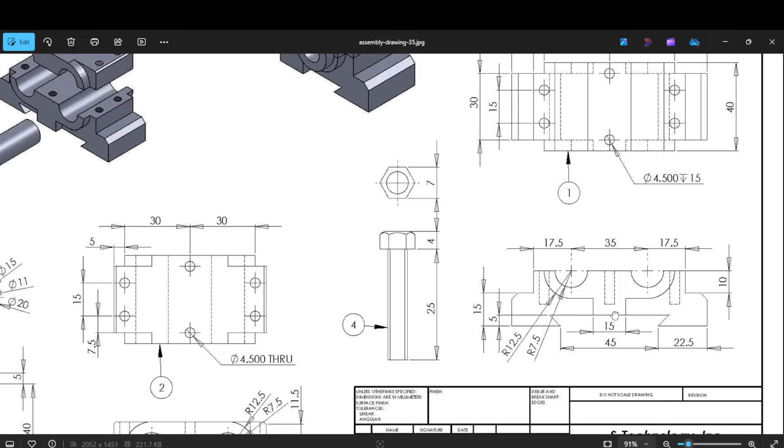This is the front view. Okay, so you are watching it from here, so this will be your front view. So we will draw the front view in Solidworks. Go to File, select New Part. Okay, select front plane, go to Sketch, select Line, trace the origin. Okay, go straight, click here, go 45 degrees,

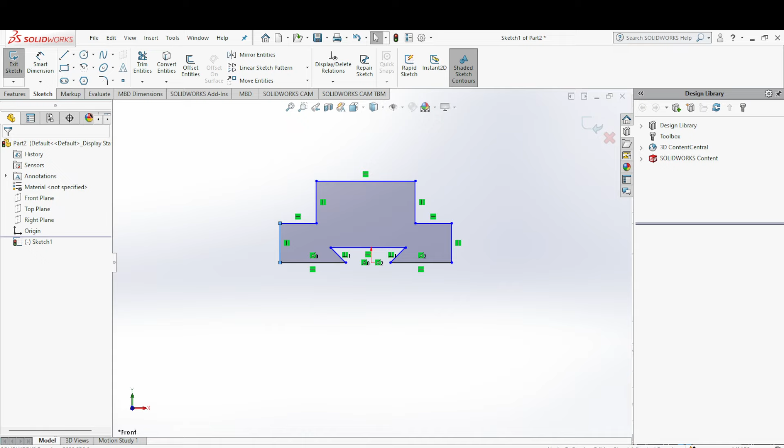go right side. Okay, then again come 45 degrees towards left and go right side, go upside, left again, then go upside and left, downwards, left and downwards, then click OK. Now we must give the dimensions. So start giving the dimension from the bottom side. Okay, so this distance is 22.5, so go to smart dimension, give it a distance 22.5, and this is also 22.5.

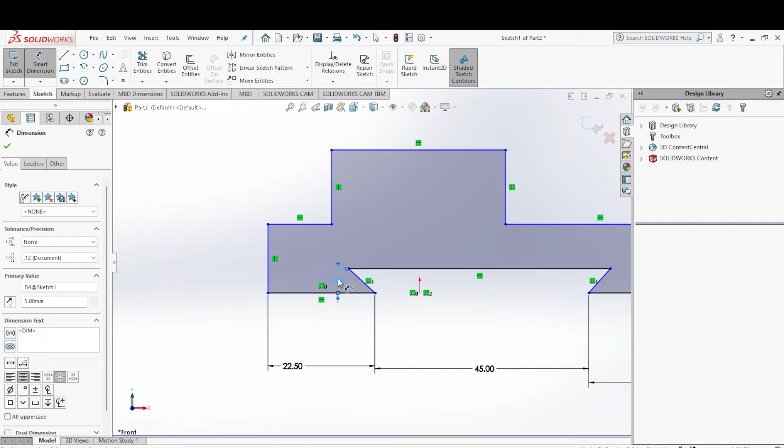Then the distance of the slot here is 45 millimeters. So give it a distance, and from this point to this point the distance is 45 millimeters. Okay, then the height of this slot is 5 millimeters. Okay, so zoom in. From this point to this line the distance is 5 millimeters. Okay, now the height here is 15 millimeters. So this will be 15 millimeters. So these two are in a relation. If not, you should give here also the same height, which is 15.

Okay, so next, this height is 10, so give it a height 10. Okay, and this is also 10. So after that, this complete distance here is 35 plus 17.5 plus 17.5. So 17.5 plus 17.5, which is equal to 35. 35 plus 35, which is equal to 70. Okay, that means this distance here is 70.

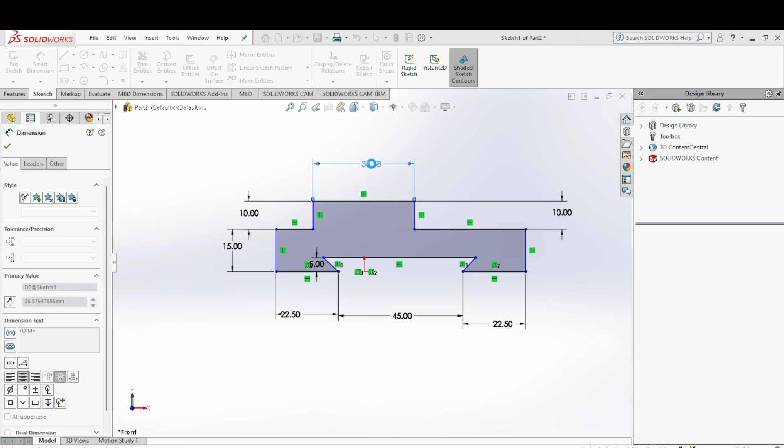So afterwards, what is remaining? We need to align this in the center. Okay, so you can give the relation between the origin and this line, like from this origin to this line the distance is, okay, we already have this distance as 5. So this is the origin, so no need to give another dimension, just delete this one. This distance is 45, the slot distance is 45, so the half of which will be 22.5. So we can specify the distance between the center and this point, which is equal to 22.5. Okay.

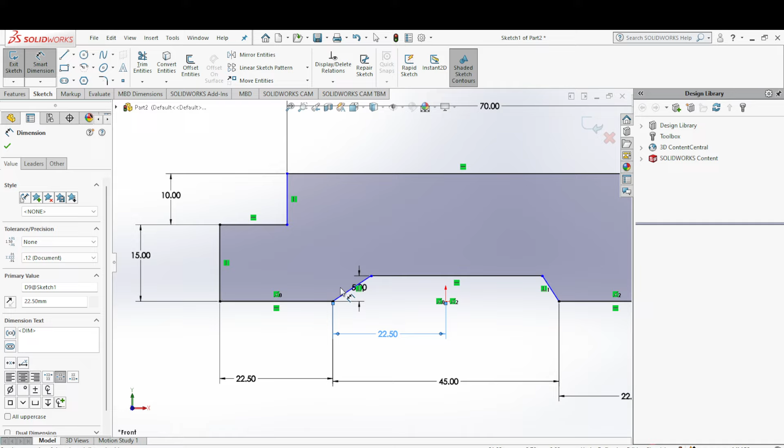Okay, now the shape of this slot is distorted. So this should be inwards. So we can specify the angle between this line and this line as 45, so it will go inwards. So to specify the angle, we need to click on this line and this line. This angle must be 45 degrees. Okay, so now it got into the slot, became like this.

Okay, so now again we need to specify the midpoint to the center distance as 0, so that it will go exactly in between. Okay, so the distance between midpoint to the center must be 0. Now the figure is fully defined. Click OK. Just let me arrange the dimensions. Okay, now the figure is fully defined.

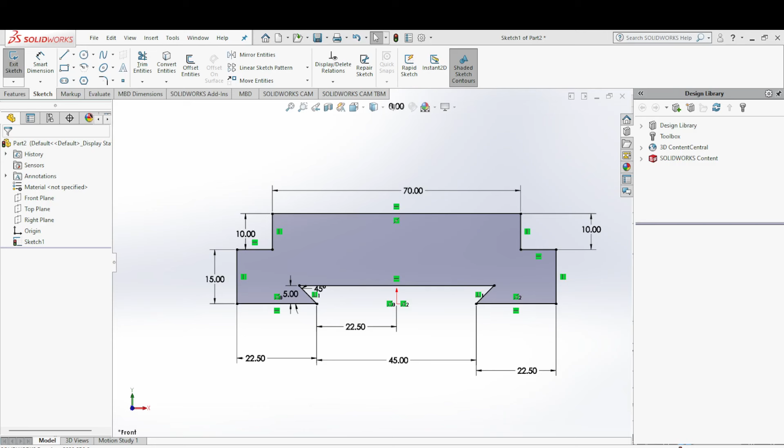Okay, click OK. After that, we need to use the extruded boss base function to give it a width 30. Okay, so go back, select the features, extruded boss base, and give it a width of 30. Then click OK. Now if you observe here, there is a chamfer, but the chamfer distance is not given. So we can give 1 mm or 2 mm of chamfer here.

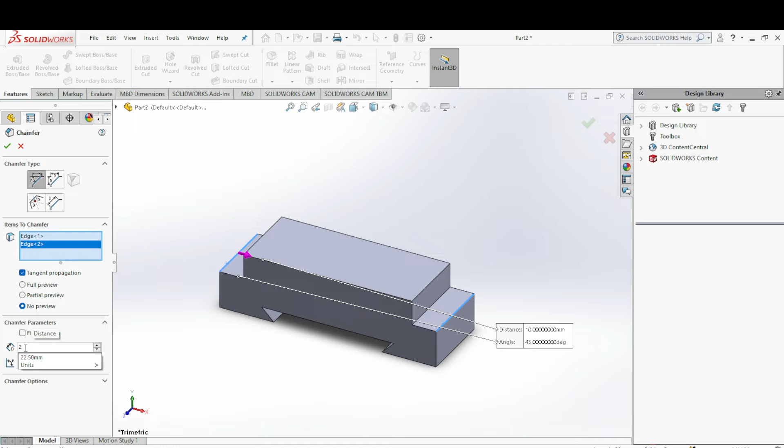So to give the chamfer, go to chamfer, then select this line and this line, select these two edges, then give a distance of 2 millimeters, then enter. 2 millimeter, type here 2 and enter, then click OK.

Now we need to draw this shape. Okay, we need to draw this portion on the front surface, front face. We need to draw this portion and extruded boss base it till a distance 5 millimeter. Okay, 5 millimeters towards left side and 5 millimeters towards right side.

So to do this, we need to draw two circles. See, the smaller circle is of radius 7.5. The radius is 7.5, that means the diameter 15. The bigger circle is of radius 12.5, that means the diameter 25. Okay, so first of all we will draw this one. Okay, we will draw this shape, then we will make two holes later.

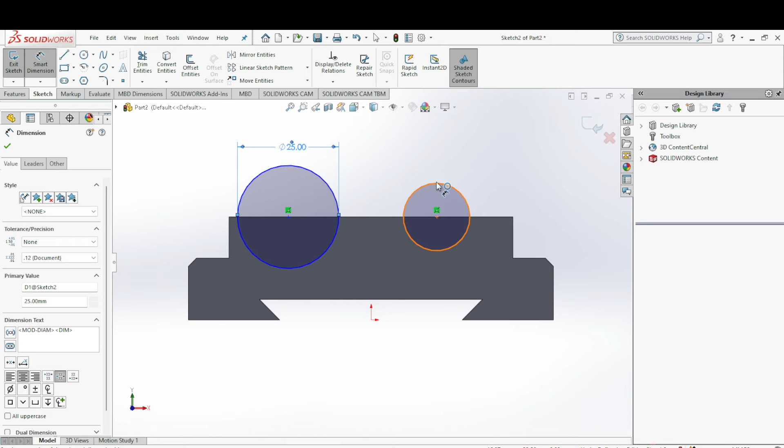Okay, let's draw the bigger circles first. Okay, we need to draw two bigger circles of diameter 25. Okay, so select this face, go normal to, then go to sketch, select circle, come on this edge. Okay, then place a circle here, place a circle somewhere here, then click OK. So go to smart dimension, the diameter of this circle is 25 and also the diameter of this circle is 25.

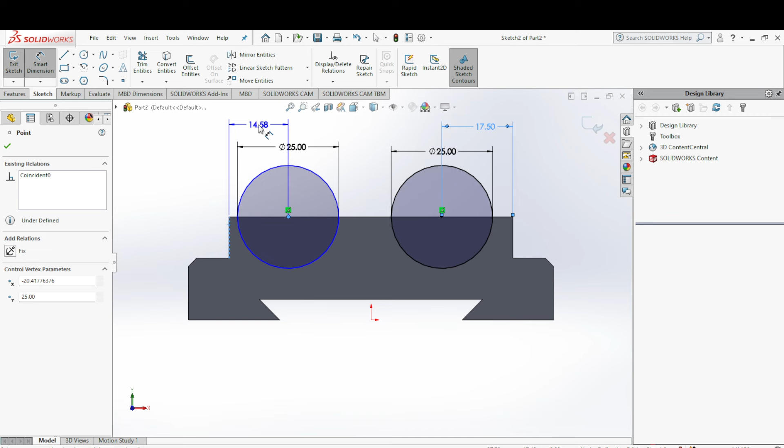Now we need to specify the distance from the origin to the end point, which is 17.5 millimeters. Okay, from the origin to the end point, which is 17.5. So from the origin to this line here, the distance is 17.5 millimeters. Similarly, the distance between this center to this edge is 17.5 millimeters. Now click OK.

Now we need to draw two lines, or we need to connect these two circles by a line. Okay, so let's connect, select the line and connect these two circles. Okay, like this, then right click, select. Now you have connected these two circles. After that, you need to draw two lines, two vertical lines, which are 15 millimeters apart. If you select the midpoint, from the midpoint it should be 7.5 towards left side and 7.5 towards right side.

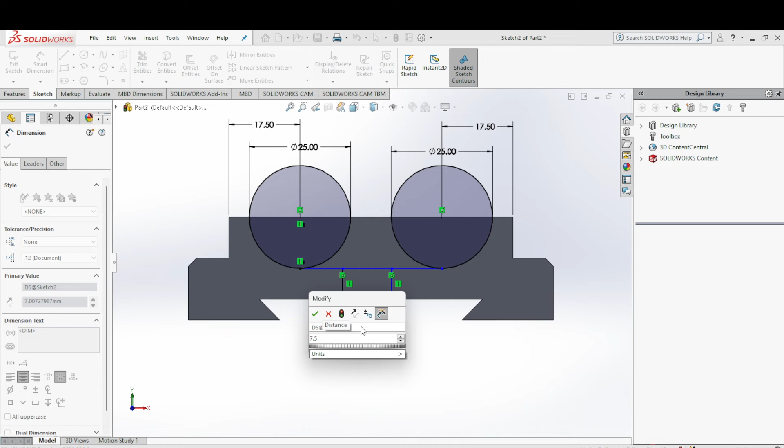Okay, so now go back to the sketch, select line, go to the midpoint. Okay, now from the midpoint go towards left side. Okay, or no need to draw a line here, simply select the line. Okay, draw a vertical line here and draw a vertical line towards right side. Then specify the distance between the midpoint to this line as 7.5, and similarly the distance between the midpoint to this line 7.5. Okay, now select OK. Now the shape we need here is this one.

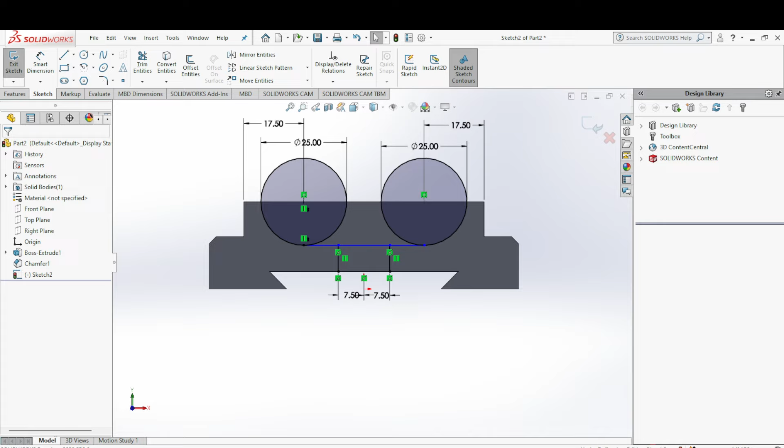Okay, so we need this shape, so let's complete the shape here. Select the line, connect these two lines and connect this total thing. Right click, select. Okay, so now we need to cut the unwanted portions. Okay, we need only this portion of the figure, so anything extra we need to trim it. Okay, so please see here carefully, we need only this portion. Okay, so anything extra we will trim it.

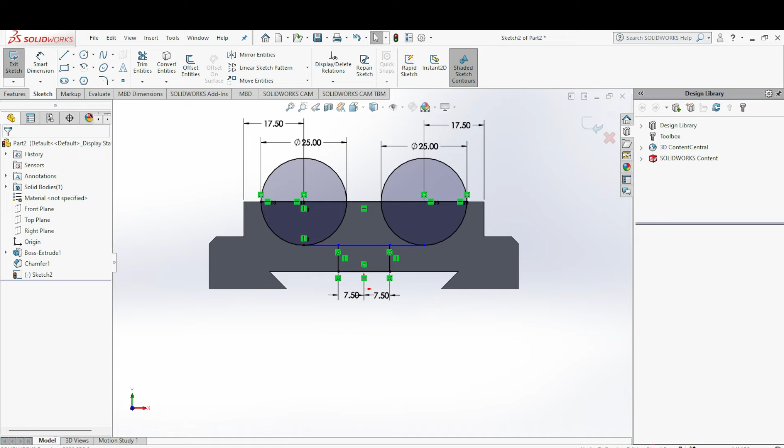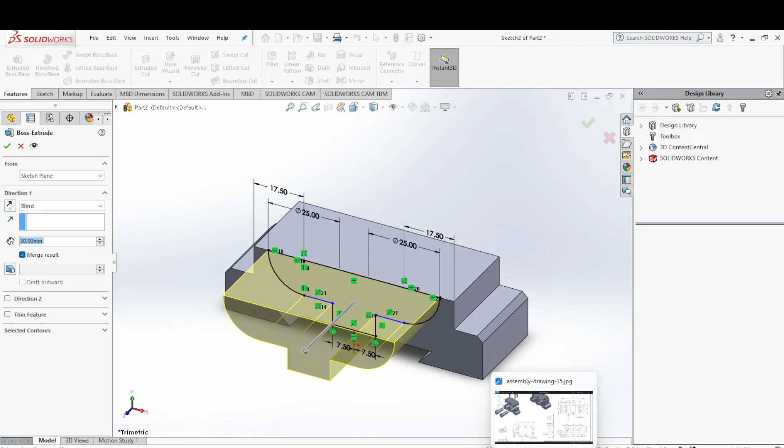So go back, select trim entities, so we need to trim this one and we need to trim this, we need to trim this one and we need to trim this and this. We need only this portion. Okay, then click OK. Now go to features and select the isometric view, go select extruded boss base, and as I explained before, this is 30 and towards left side it is 5 and towards right side it is 5. So here we can extruded boss base it towards left side for a distance of 5 millimeters. So make this 5, enter, click OK.

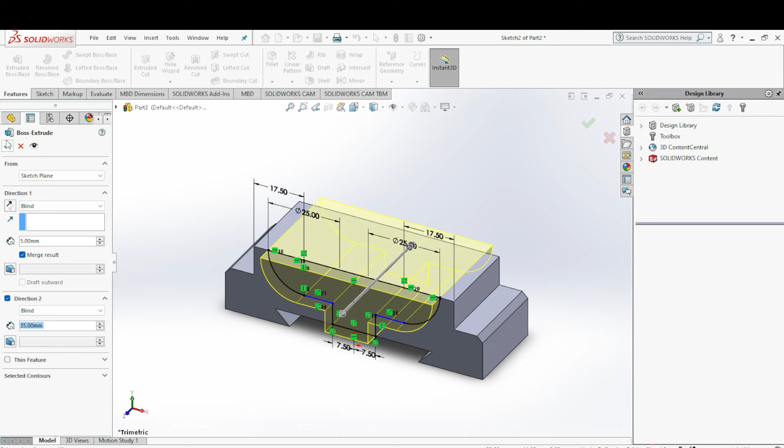Okay, we can also do it on the other direction, which is towards right side. So towards right side this is 5 millimeters, but we are starting from here, so we need to add this 30 millimeter as well. So this is 30 plus 5, 35. Okay, so give it a second direction. Turn on the second direction and towards second direction it should be 30 plus 5, which is 35. Write 35 millimeters. Okay, then click OK.

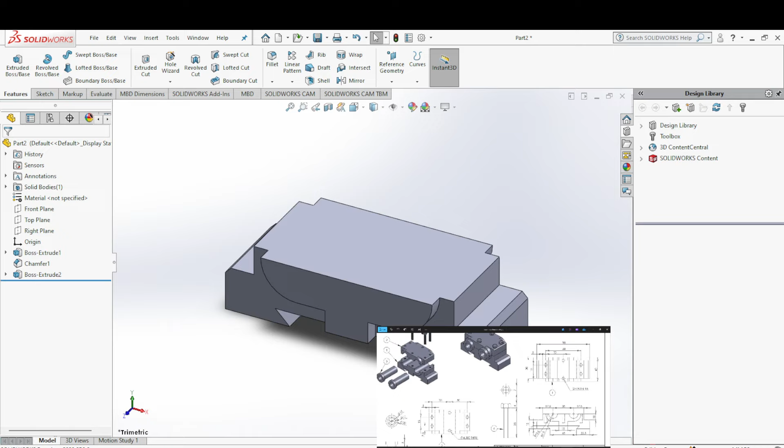So now we are almost done. We need to place two holes here. Okay, see the smaller holes which are of radius 7.5. This radius 7.5 means the diameter is 15. So select this face, select normal to, go to sketch, select circle. So to find out the center of the circle, come and wait on the circular portion. Now the center is visible. Click here and place a circle. Similarly, wait on this second circle to see the center and place a circle here and click OK.

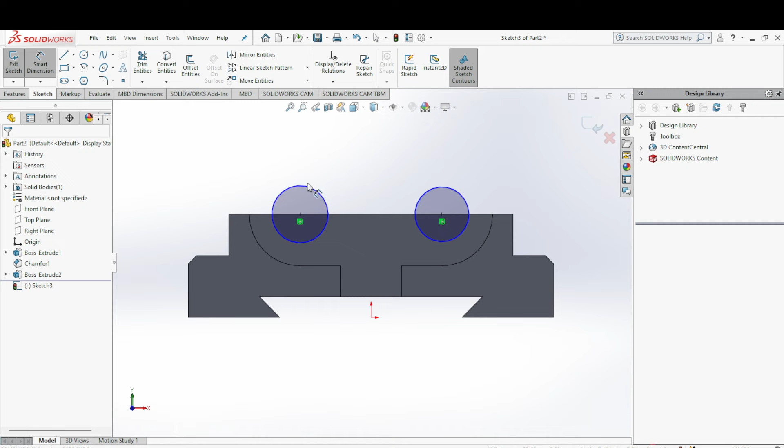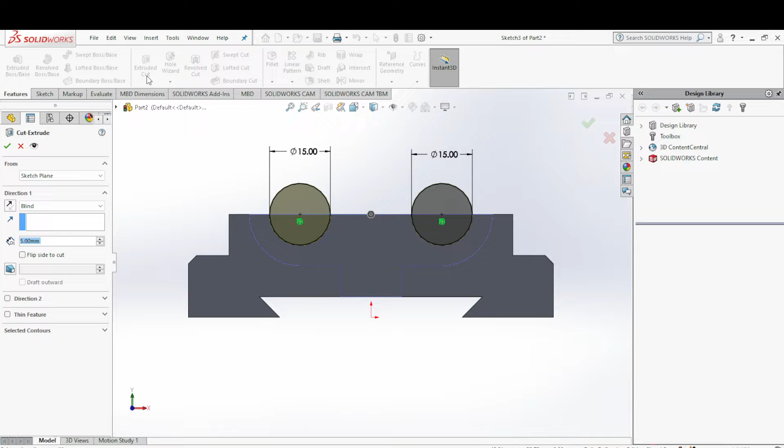Now go to smart dimension and give the radius or the diameter. Radius is 7.5, so the diameter will be 15. So this is 15 and this is also 15. Then click OK. Now we are ready to go. We need to make two holes here. See, we need to make two holes through all. Okay, so go to features, select extruded cut, and to see the direction, select isometric view, and here you can select through all both. Okay, so then simply click OK. Now the first part is created successfully.

Now what is remaining here? So if you see, there are 6 holes, which are of diameter 4.5. Okay, we need to place these holes. 1 2 3 4 5 6 holes. So let's place them one by one.

So the holes can be placed easily on the top view. So let's select the top view, select normal to, then go to sketch, select circle, now place the circles like this on this line. Trace this one, place a circle. So here we need to trace this and place the circle.

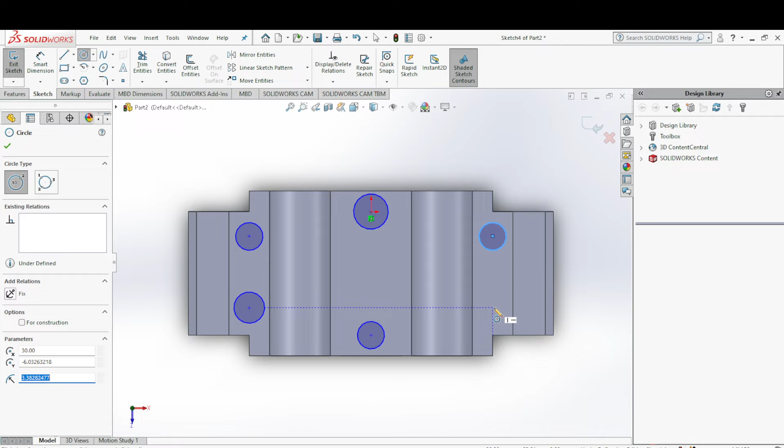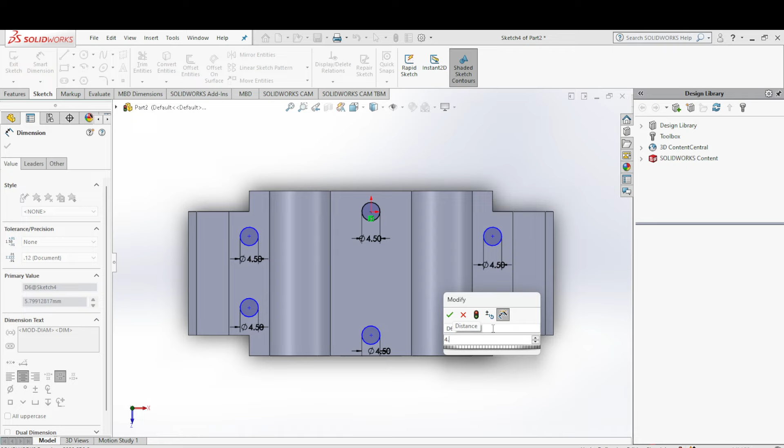So all these circles are of diameter 4.5 mm. So go to smart dimension. So this is 4.5. This is also 4.5. So give all the 6 circles diameter of 4.5.

Now we need to give the distance. Okay, so the distance between these two circles is 15. So the center to center distance from this circle to this circle is 15. So the total distance here is 30. So if this is 15, the remaining distance will be 15, which is divided into 2, which will be 7.5. 7.5 here and 7.5 here.

Okay. So the distance from the center to this edge is 7.5. So no need to give 7.5 here because there are already two dimensions, so no need for a third one. If you check, this one will over define the figure. See, it's already 7.5. So no need. Simply press escape.

So do the same thing here. The center to center distance, go to smart dimension. The center to center distance is 15, and the distance from the center to one of the edges here is 7.5. So next thing,

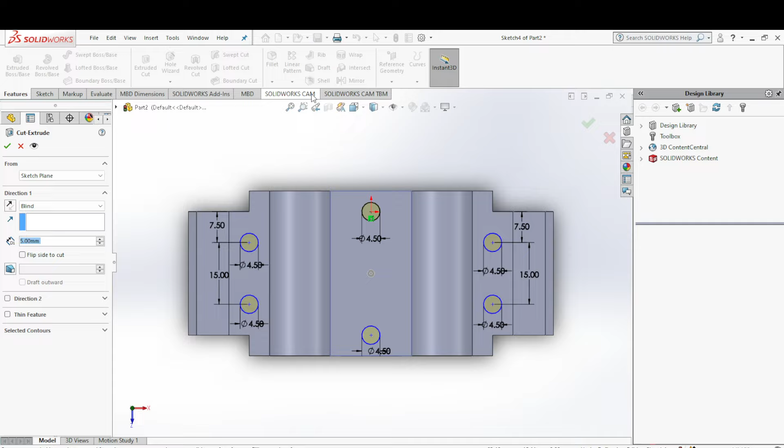So go to features, extruded cut, go to isometric view and give it a depth of 15 millimeters. Then click OK. Now the holes are made. The first part is completed successfully.

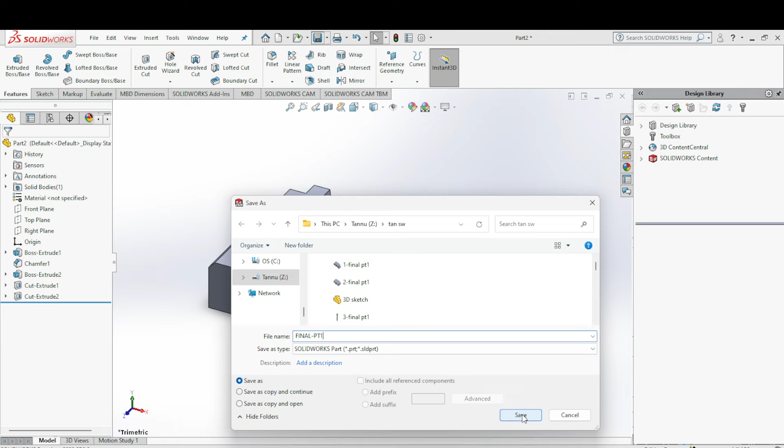Now you need to save it. Save, type any name like final PT1, part 1. Okay. So now close it and open a new part file to draw the second part.

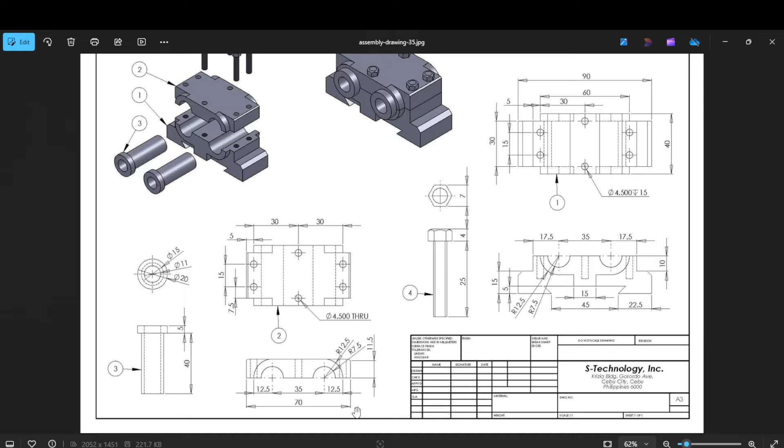So the first part is over. The second part is the upper portion, which is here. Again we will select the front view to draw this part. So first of all we will draw the rectangle. The length of the rectangle will be 70 and the height is 12.5.

Here the height is given as 11.5, but if you observe closely, there is a chamfer of 1 millimeter. So the total height is the height of the circle. The height of the circle here is 12.5. So 1 millimeter is reduced because of the chamfer.

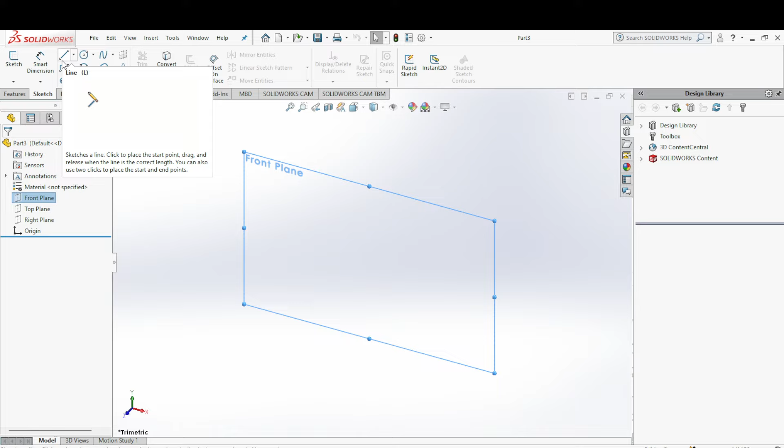So first of all, we will create a rectangle. Then we will give an extruded boss base of 30 again. So this is 30 and this is 5. This is also 5. Okay, now let's go to the front plane. Go to sketch, select a line, or you can select a rectangle as well. So draw a rectangle.

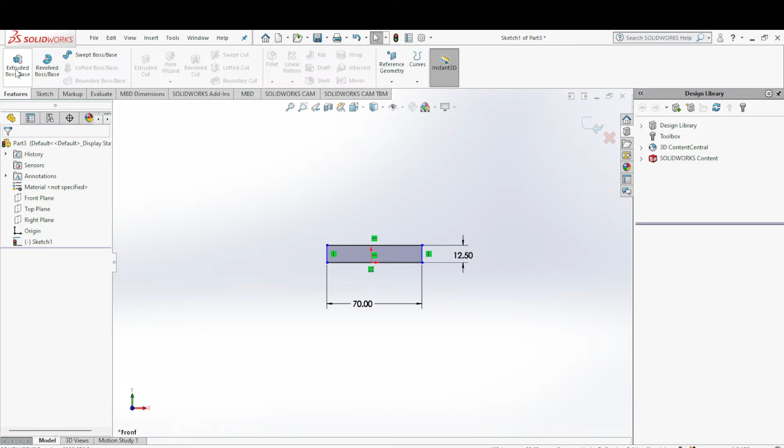Click OK. Go to smart dimension. The length of the rectangle is 70 and the height of the rectangle is 12.5 millimeters. Then click OK. 70 and 12.5. Now we need to extrude it to a distance of 30, so go to features, select extruded boss base and give it a width of 30. Enter. Then click OK.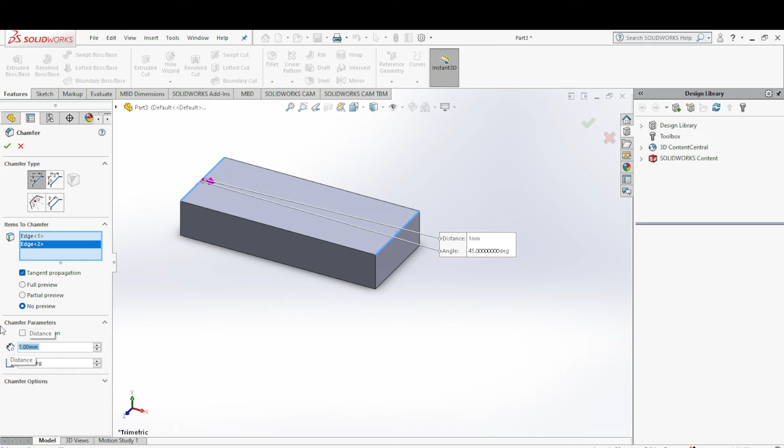Again here we have a chamfer. The chamfer is very small, which is 1 mm. So go to chamfer, select this edge and this edge and give it a distance. The chamfer distance is 1 millimeter. Then click OK. So the chamfering is done now.

So what is remaining? We need to draw this portion now. Again we will follow the same step as part 1. So we will only draw the upper portion like this, then we will make holes at the end.

Now we need to draw two circles of diameter 25. The radius is 12.5. The radius of the bigger circle is 12.5, that means the diameter is 25. Here also the diameter is 25. So we need to place two circles at the bottom of this rectangle.

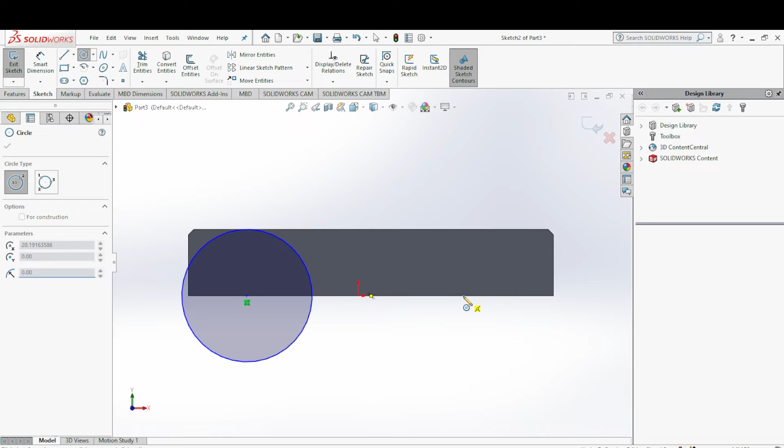So click here, select normal to, go to sketch, select circle. Draw one circle here. If you touch this line, that means the radius is 12.5, because the height of the rectangle is 12.5. So if you trace the circle from bottom to top, the radius will be adjusted to 12.5, no need to specify the radius again. Just drag this line till the upper edge.

Then click OK. Now the distance between these two circles, or the distance between the centers, is 35. So select smart dimension. The center to center distance is 35 millimeters.

Still these two circles are not placed in the middle of this rectangle. So how to place it? Give one more relation. The distance between this center to the right side, the total width of the rectangle is 70 and this distance is 35, so the remaining will be 35, which is divided into 2. That means this distance from the center of the circle to the end of the rectangle, this edge, is 17.5.

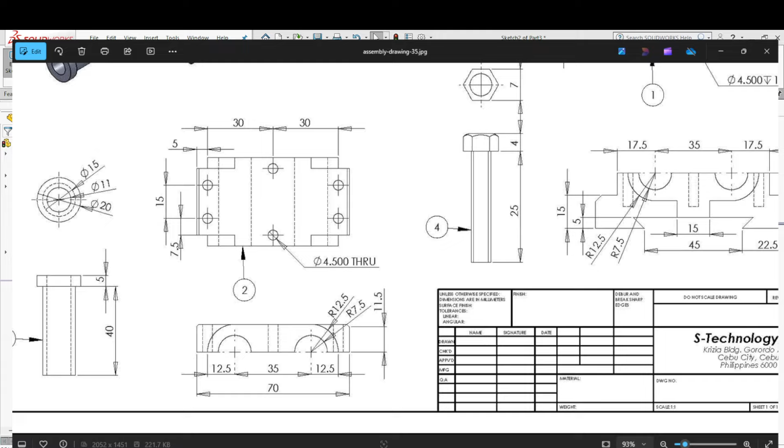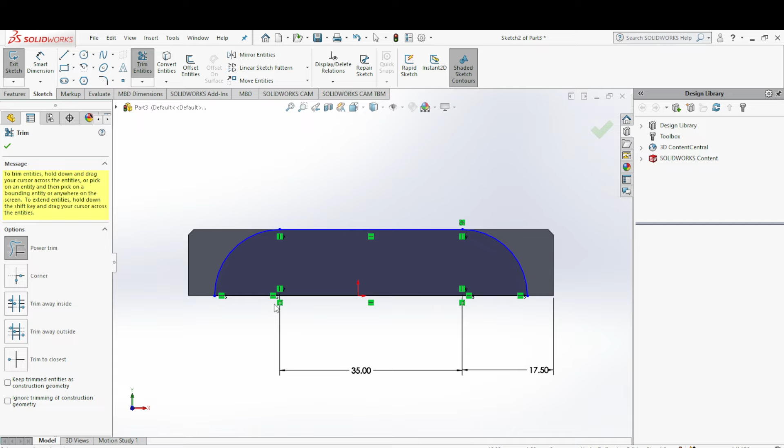Now we need this portion. Already we have placed these lines, so whatever is extra, we need to trim it. We don't need the semicircles which are present outside the rectangle. So now select trim, cut this semicircle and this semicircle, and also this portion we don't need. Delete the semicircles and also this inner portion so that this area is highlighted. This area should appear shaded like this so that it is correct.

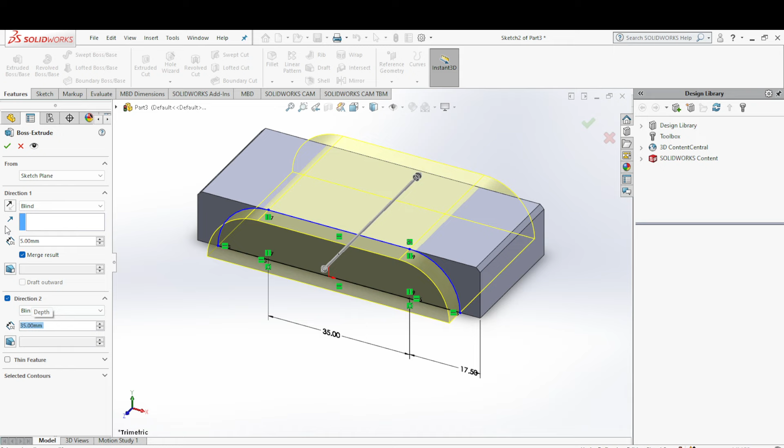Now select the isometric view. Similarly, like we did for the first part, we will use the extruded boss base. In the first direction we will give only 5 mm, and on the second direction, which will be 30 plus 5, which is 35 millimeters. Then click OK. Again click somewhere to see the figure.

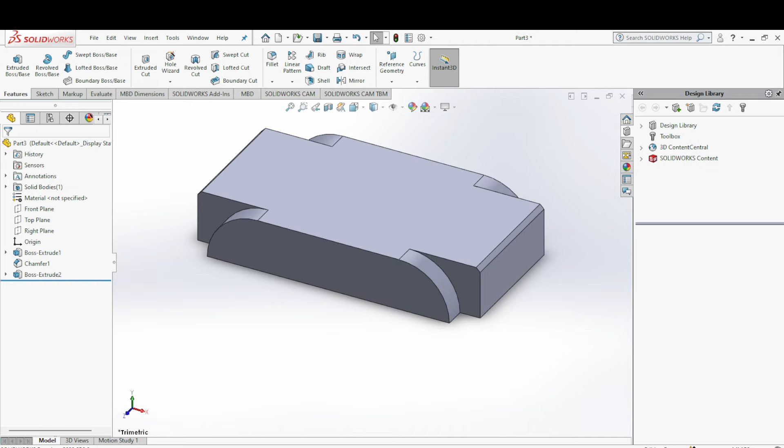Now what is remaining here? The two holes of radius 7.5. The radius is 7.5, that means the diameter is 15. Now click this face, normal to, go to sketch, select circle. To see the center of the circle, you need to wait here so that the center will appear. Click the center, place a circle. Similarly, wait here, the center will appear, then go to center and place a second circle. Click OK. Now the diameter of the circle is 15, and the diameter of this circle is also 15. Then click OK.

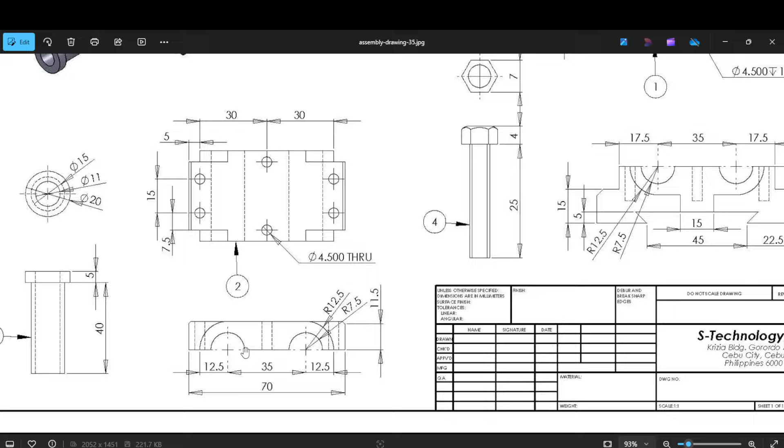Now we need to cut through these circles, through all. Go back, select isometric view, go to features, extruded cut, select through all both. Then click OK to cut from the part.

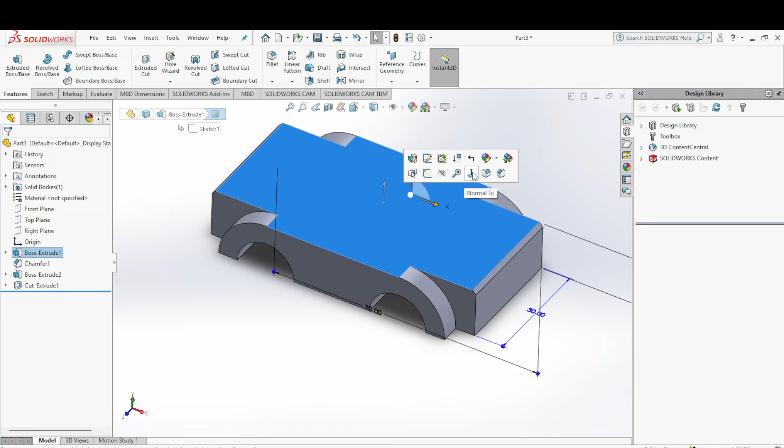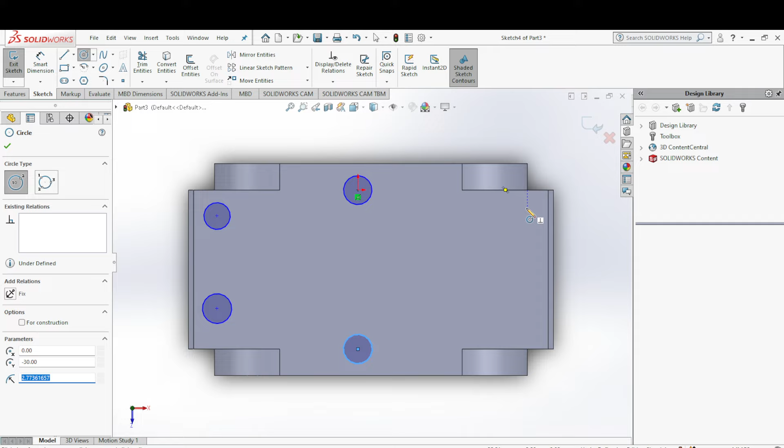Now the last thing is the holes. We need to make 6 holes similar to the first part. Let's do it. Click here, select normal to, then go to sketch, select circle. Trace down from here. You need to place 6 circles: 1, 2, 3, 4, 5, 6 circles. Again all these circles are of diameter 4.5.

4.5, 4.5, 4.5, 4.5. Now we need to specify the distance between these two circles, which is 15, 15, and 5, 5.

The distance between the center to the center of the second circle is 15, and the distance from the center to this point is 7.5, and the distance from this center to this edge is 5. Similarly, do it here: the distance from this point to this point is 15, the distance from the center to this edge is 7.5, and the distance from the center to the edge is 5.

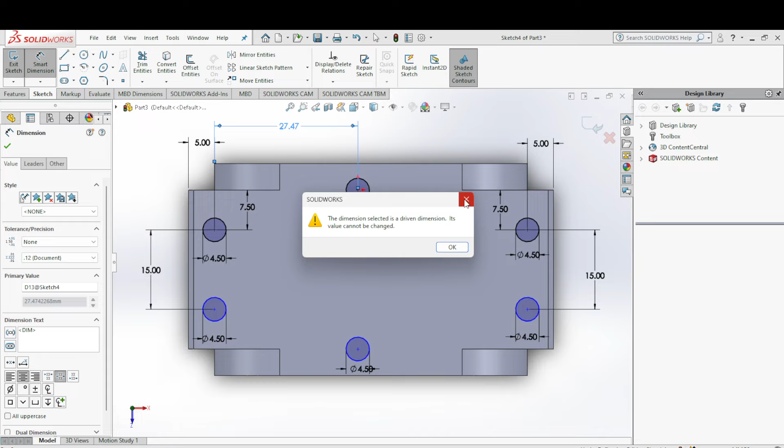I think we placed this circle at the origin, so that's why it is not taking the dimension adjustment. So click this one, and delete this relation.

Now let's give the dimension. It is 30. Delete the relation. Don't place it in the first place. You should not place this in the origin.

Now this one is also at a distance of 30 from this place. Go to smart dimension. From the origin to this line, the distance is 30, and from the origin to this point, the distance is 5. Here also the distance is 5.

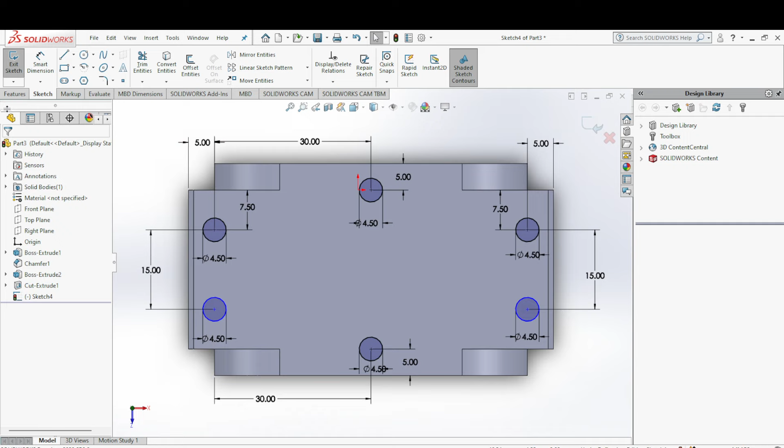Now we have placed the circles, then click OK, go to features. We need to make these 6 holes, extruded cut, and select through all. Here, 4.5 millimeter diameter through all. Select through all, then click OK.

Then go to the isometric view. Now the second part is also done. Now we need to save it. Save final.

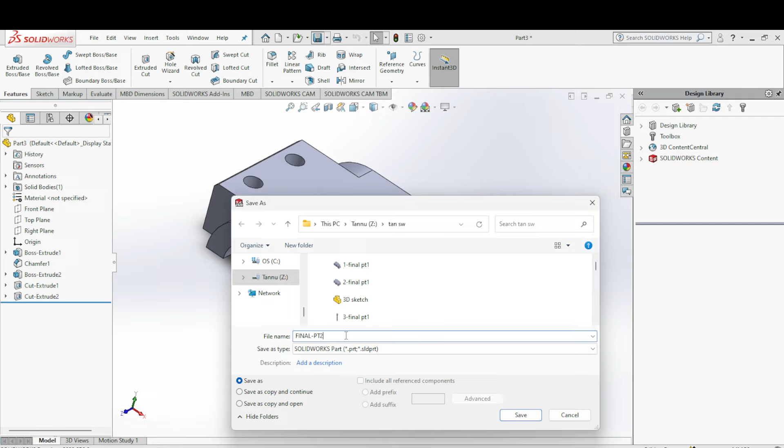Part 2. Now again open a new file for the third part. So this is the third part. It's very easy, very small part.

Again we will draw this in the right side view—sorry, not right side, front view. It is similar, like all of these 3 figures are facing the front side, so we will draw the third part also in the front plane.

First of all we will draw the bigger circle, which is of diameter 20, and we will extrude it till a depth of 5. See here, this depth is 5 millimeters, the bigger circle, which is of diameter 20. Then we will draw the smaller circle.

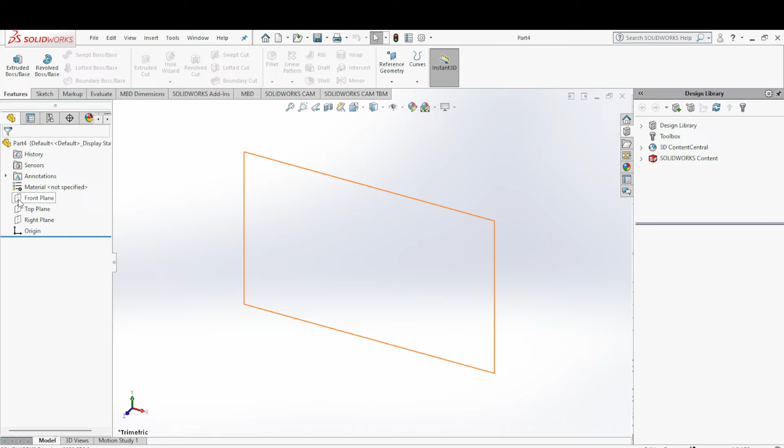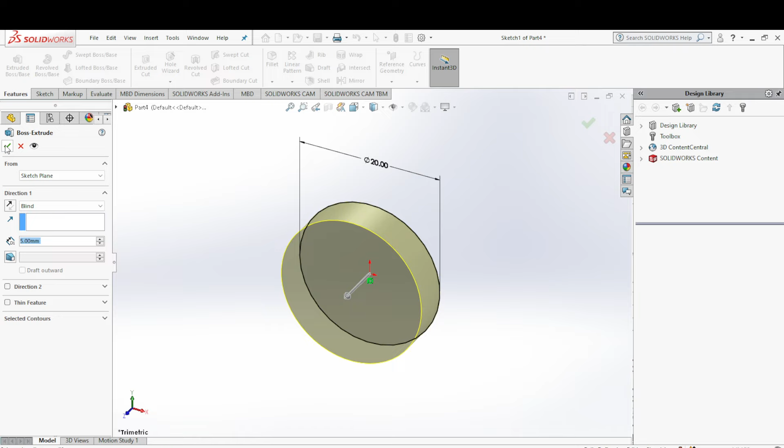Select front plane, sketch, select circle, go to the origin, place a circle, click OK, go to smart dimension, give it a dimension of 20. The bigger circle is of diameter 20, click OK, go to features, extruded boss base, and 5 millimeters. Enter 5, click OK. Now this part is over.

Now the second one, see, we are watching the front view, so the backside portion will be in a hidden line. So the diameter of the backside circle will be 15. So this is 15.

And we need to draw this circle at the back side, not at the front side. See here, we need to rotate this part and select the back side portion, select normal to, or simply from here also you can take the back view, back side portion.

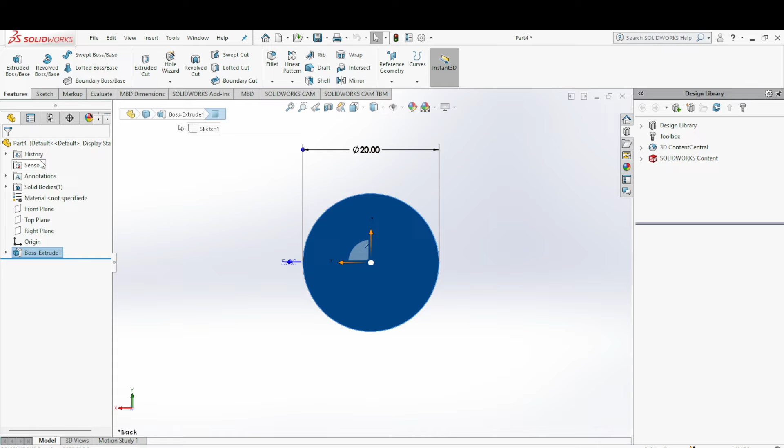Go to sketch, circle, click at the origin, place a circle, click OK, smart dimension. So the diameter of this circle is 15.

Then click OK, go to features, extruded boss base, select isometric view, and the extruded boss base, what is the distance here? 40. So give it a distance of 40, then click OK.

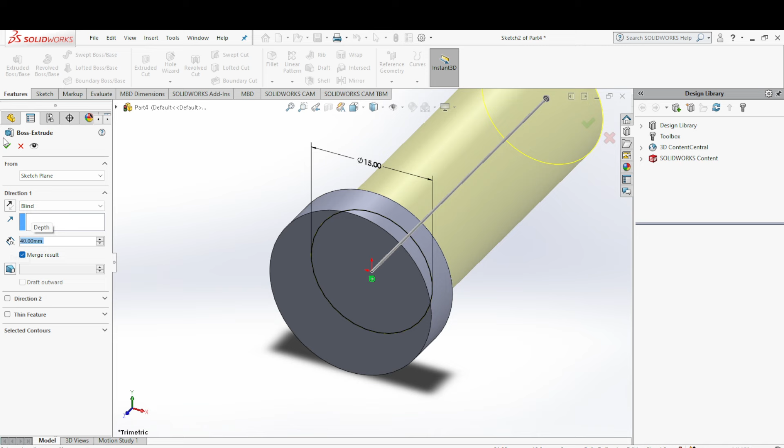So now what is remaining here? The hole. See the part, you have a hole inside this part. So that hole is of diameter 11.

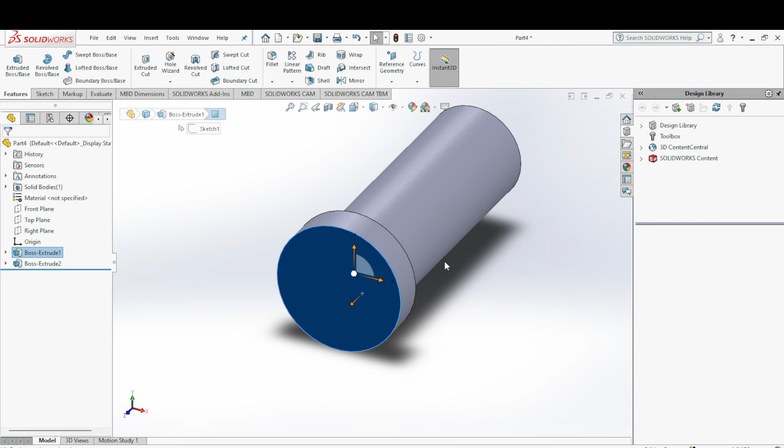So click here, select normal to, go to sketch, circle, click the origin, place a circle here. Go to feature, extruded cut through all, both, then click OK. So now you have created the hole inside the part. So now this part is also completed.

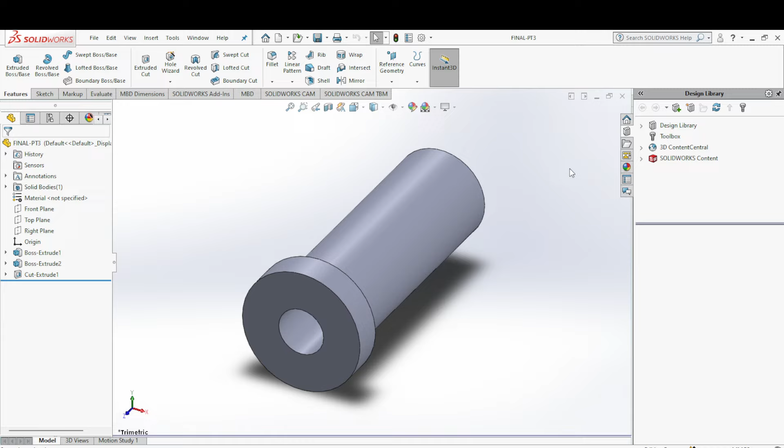So save, final, PT3 part 3, then save. So now we need to draw the bolt, which is the last part. Go to file, new part.

So here it is, the fourth part is the hexagonal bolt. This portion is visible in the top view. So all the three parts, this bottom, this part and this part, three parts are made in the front plane. But coming to the fourth part, it should be drawn in the top plane. See, this hexagon is visible in the top plane.

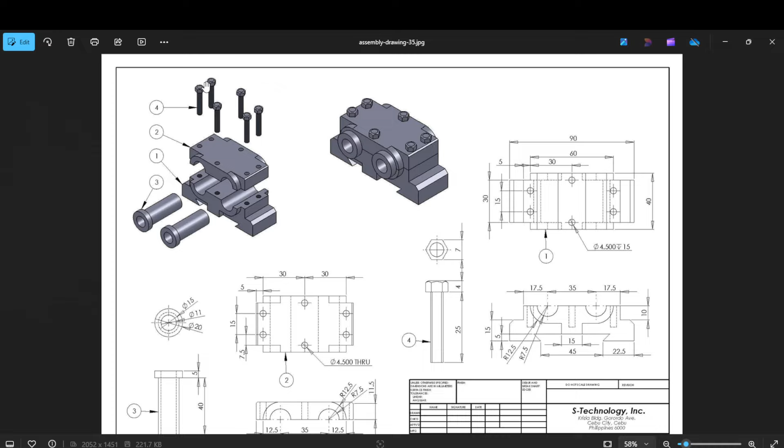So we will choose top plane. Part number 4 is a hexagonal bolt, and the hexagon is visible in the top view. So go back, select top plane, go to sketch, select a polygon. For hexagon we need to type 6, then place a hexagon, place it horizontally, click OK.

Then the distance between the two edges is 7. So go to smart dimension, distance from the top edge to the bottom edge is 7. Type 7, then enter, then click OK.

Now the depth of the extruded boss base should be 4. The depth is 4 millimeters. Go to features, extruded boss base, then 4 millimeters, then click OK.

Now the bottom portion. So here, the depth of the extruded boss base is 25, and the diameter of the circle we can take as 4 millimeters.

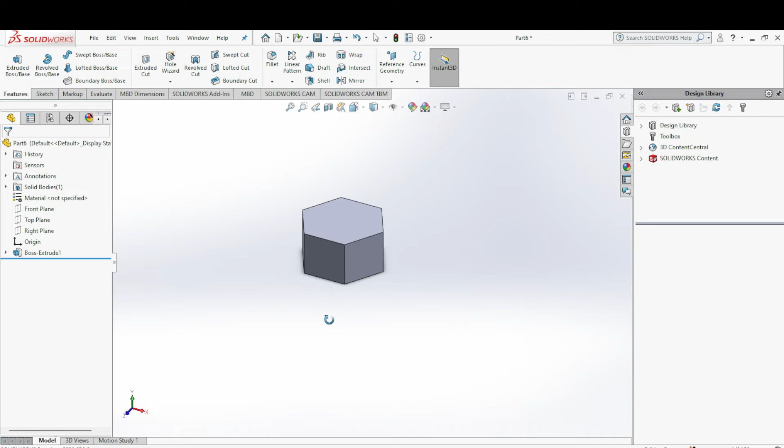Okay, now go to bottom of this, select normal to, sketch, select a circle, draw a circle, then click OK. Go to smart dimension and give it a diameter 4, click OK.

Go to features, extruded boss base, isometric view, then the depth is 25, so type here 25, then click OK.

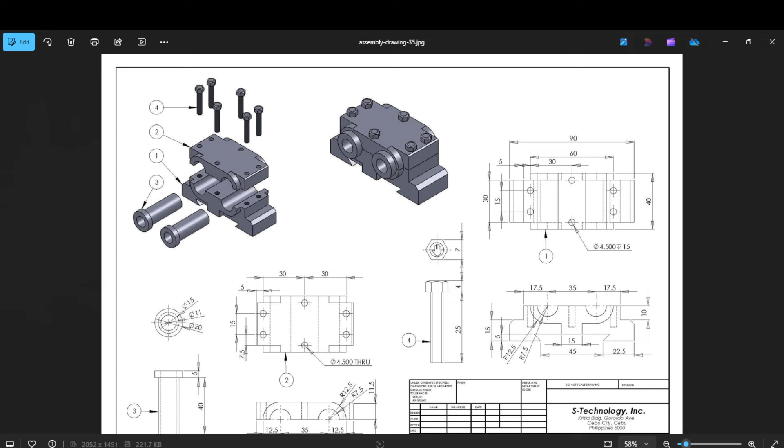Now to design the top portion of the bolt, we need to draw a circle and use the extruded cut feature. Select normal to, then go to sketch, select a circle.

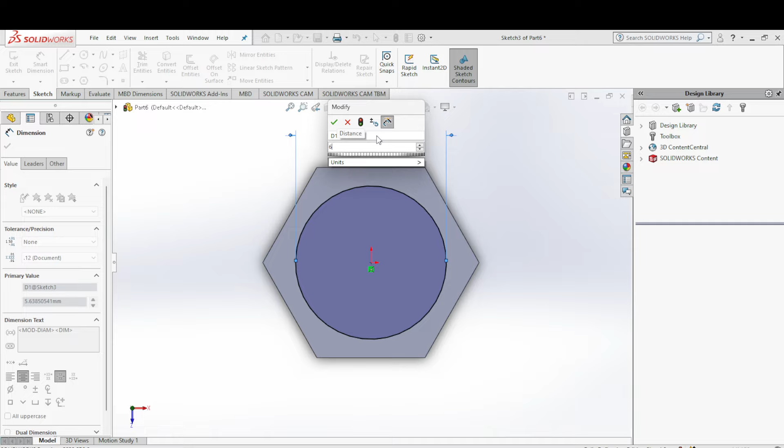Draw a circle, give it a dimension of 6, 6 millimeters or 6.5 millimeters.

Then click OK, go to features, extruded cut. So now it is cutting. To see the direction, select isometric view.

Now if you see here, it is cutting inside, so you need to flip the side to cut. Click the flip button, so it is cutting outward. Now select the draft function, make the draft on, 45 degrees, then click OK.

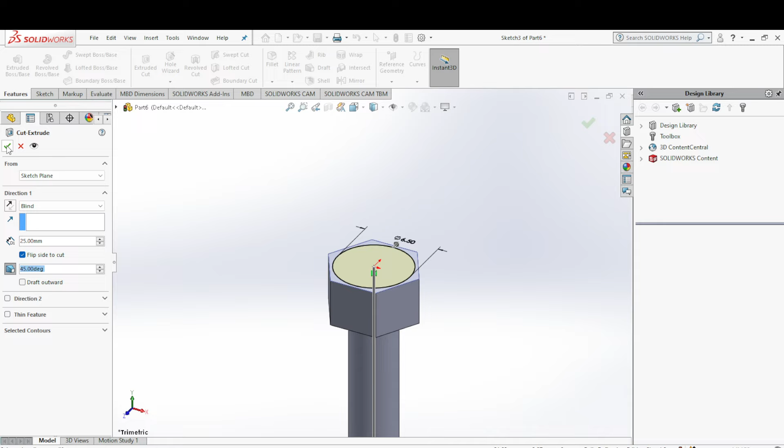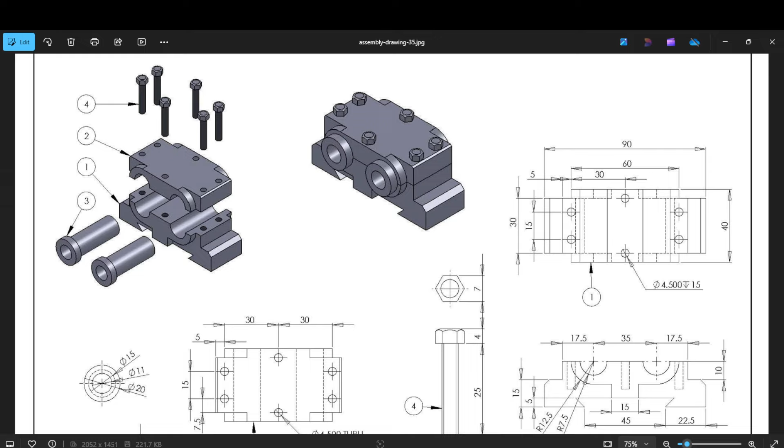Okay, so now here we need to add the grooves. So we need to add the thread here.

Select thread function, go to features, select the hole wizard, go to thread. Now the thread location should be the outer face. Select this circle. The distance is 25 millimeters already, so type here 25 millimeters if it is not there.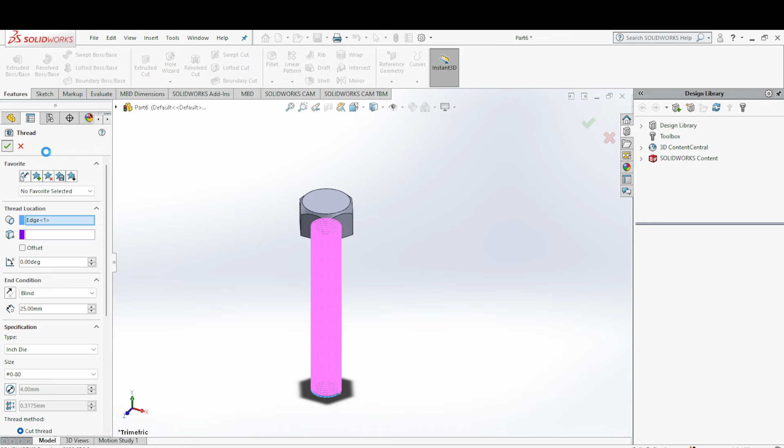Then click OK and save it. Final, part 4.

Then close it. Now open the assembly, go to new, select the assembly, and select the files: final part 1, part 2, part 3, and part 4. Then open it.

Now place the first part at the bottom, the second part should be at the upside, this one should be here, the bolts must be here. So now we have only one bolt here, we need 5 more.

So what we will do: we can copy paste. Simply select the bolt, Ctrl C, and wherever you want to place the bolt, move the cursor there and click Ctrl V on the keyboard. Press Ctrl V wherever you want the bolt, move the cursor and simultaneously press Ctrl V. Two more, Ctrl V, Ctrl V. Now we have 6 bolts.

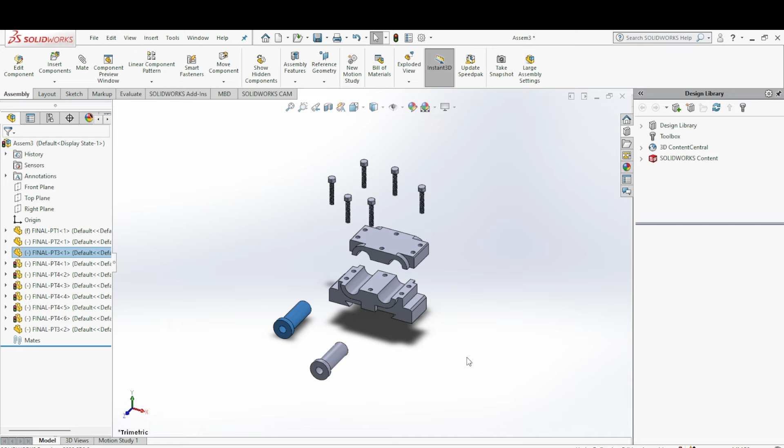Now we need one more part, so Ctrl C, Ctrl V. Now we have all the parts required to do the assembly. So first of all we will place this one on top of this one. The part 2 should be on top of part 1.

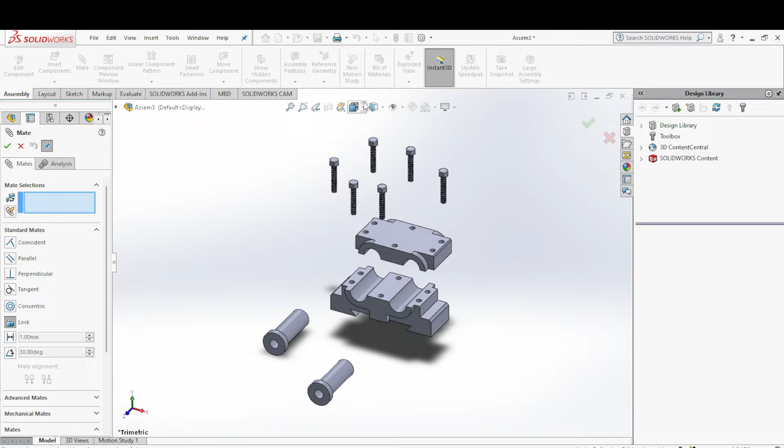So go to mate. Use isometric view, zoom in, select this circle. Go to mate, select this semicircle and select this semicircle, so that is concentric mate.

Then click OK, and select this one, select this one, then click OK. Now this is fixed.

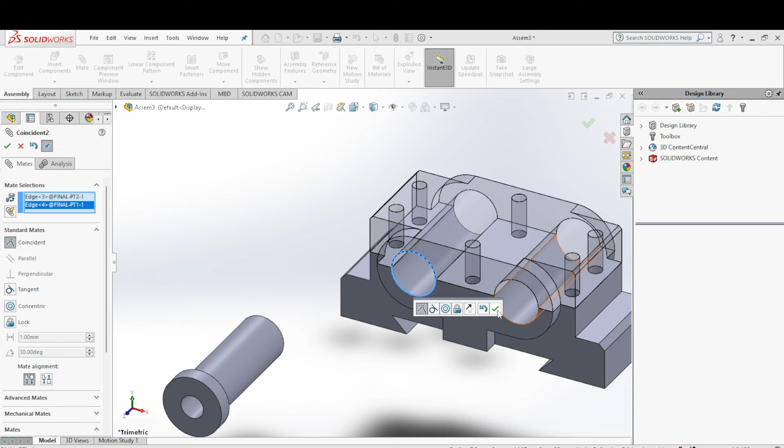Now you need to select this part, and you should insert it into this hole. To do that we will again use the concentric mate. Select this circle, go back side and select this circle, then click OK.

Similarly, to insert this part, select the circle here and select the backside circle to use the concentric mate. Now what is remaining? The bolts.

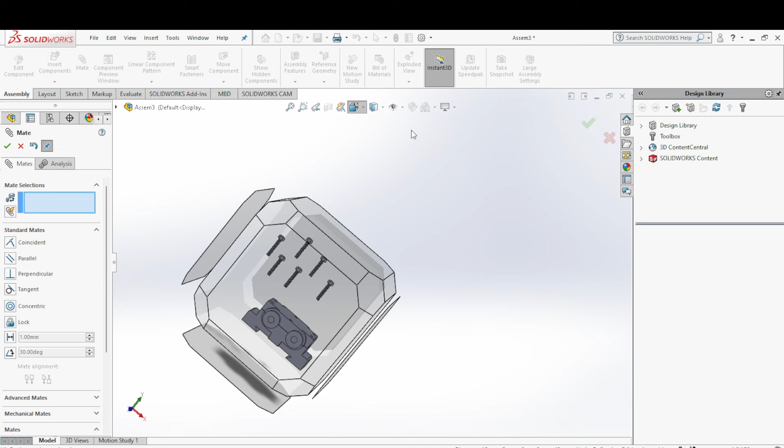So to insert the bolts you will use the concentric mate again. Select this circle and select this circle, then click OK. Now select this edge and select this surface, it will go inside, click OK.

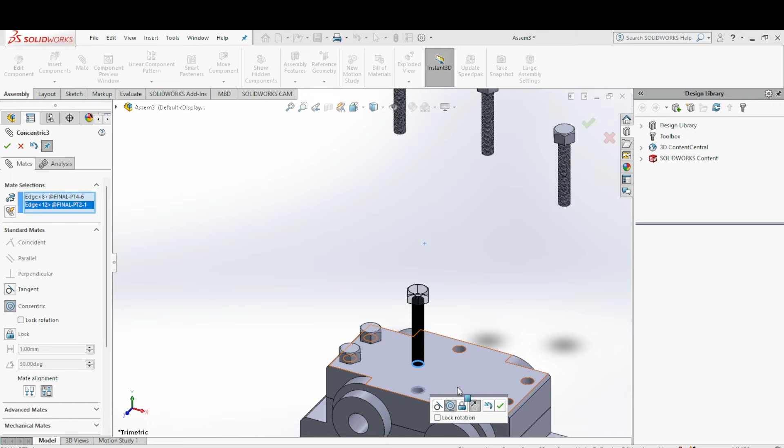Similarly you will do it for the remaining bolts. Select this one, the circle, select this circle, then click OK. Now select this edge and select the surface, it will go inside. Select the circle, select this circle, click OK, then select the edge, select the surface, it will go inside.

Select the circle to use the concentric mate, click OK, then select the edge and surface. Now all the parts are assembled, click OK.

Now we will create the exploded view. Click the exploded view. So we will select the bolts.

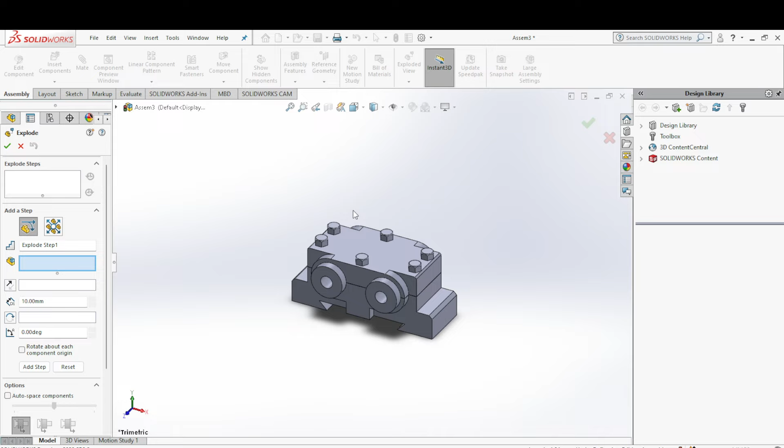And first of all the bolts must go upside. So click all the bolts: 1, 2, 3, 1, 2, 3, 4, 5, 6. Now all the 6 bolts are selected.

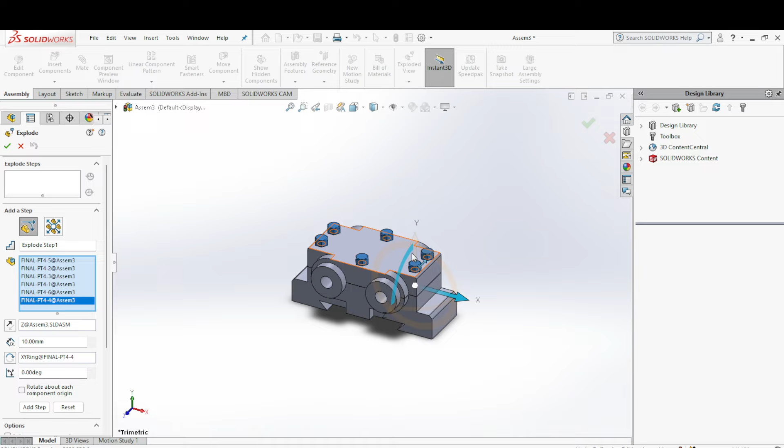Now, control Z, wait, go to the exploded view. Select all the bolts: 1, 2, 3, 4, 5, 6. Then these bolts must go upside. Select the Y direction, click and go upside, then leave them here and click done.

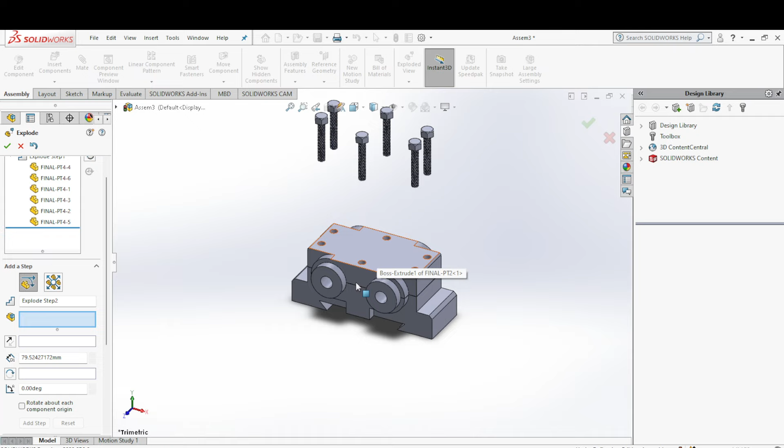After that, this portion, this upper side part, these two collars must go outside. Click this one, click this one, and they will go outside like this. Place them here at a distance, then click done.

Now the bottom portion, it will go downside. Then click done. Now this finishes the exploded view.

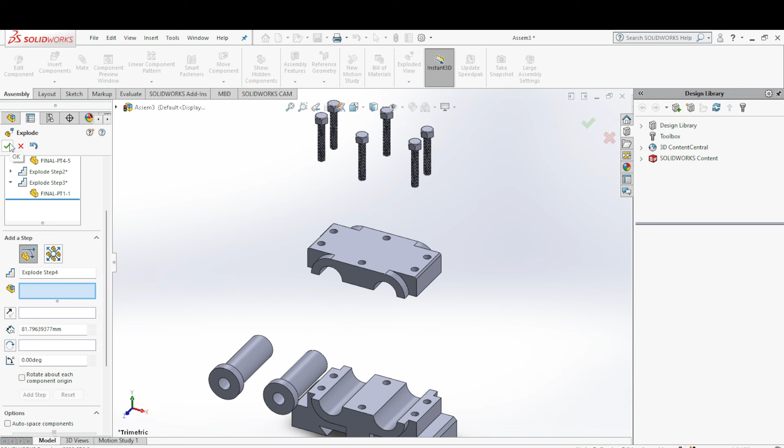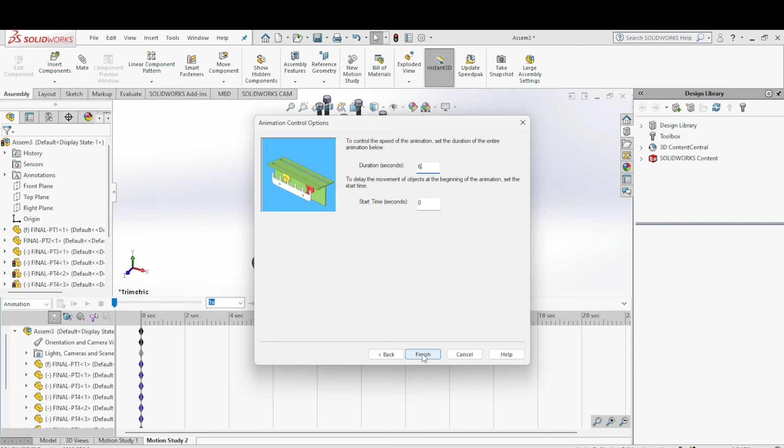Now to play the animation, go to new motion study, select the animation wizard, select collapse, click next, give it a timer of 6, then finish, then play.

Animation, final assembly. With this, the assembly is done.